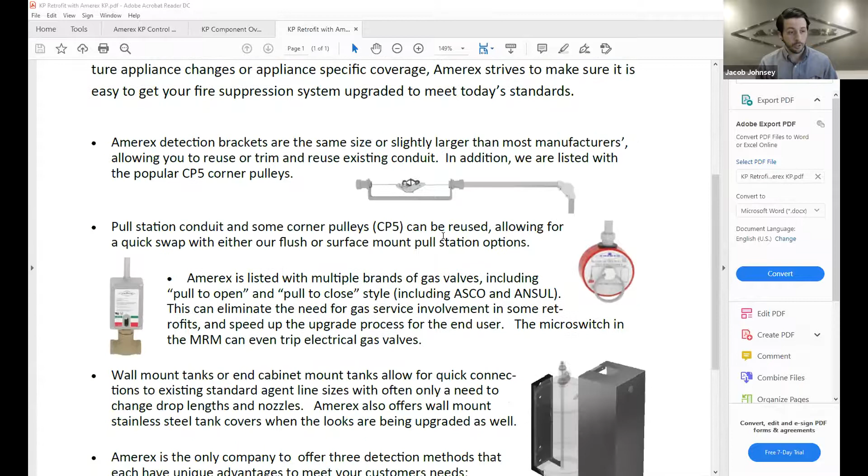The third one that I'll just kind of touch on here is the gas valve. So we're listed with multiple popular gas valves already. So there's a good chance that the gas valve that's already at that job is compatible and works with the Amerex system.

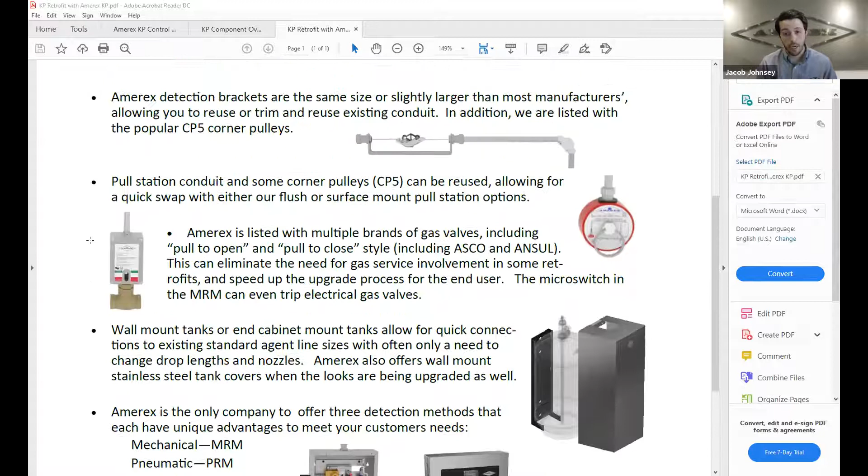The third document we'll get to, and this is a huge document, but this is a really good document. So I hope you guys have a couple hours. We're going to go just page by page. There's all 96 pages here to make sure. I'm just kidding, obviously. It's our parts book and component overview. So this does a great job of giving you just that, an overview of our entire systems, what goes into the makeup of all these.

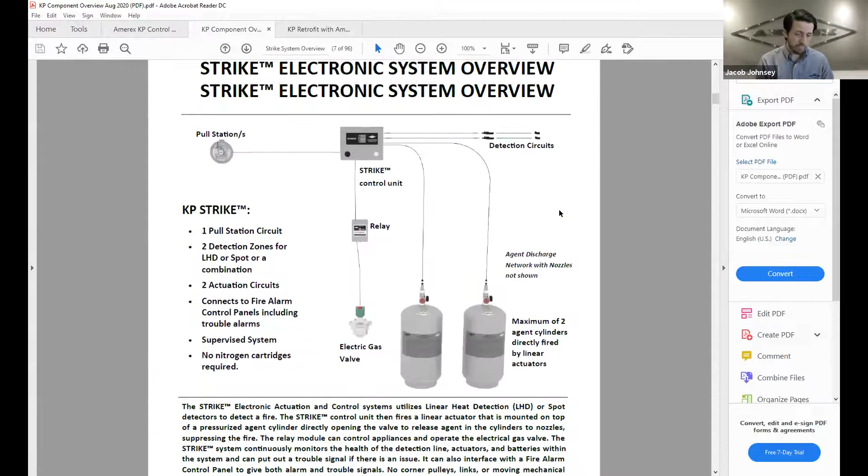And obviously, a lot of you guys already kind of know this, but it just gives you a good tool to work off, especially if you're working with anybody new within your organization, or if you're working with a customer that's not familiar with the fire suppression needs that they have.

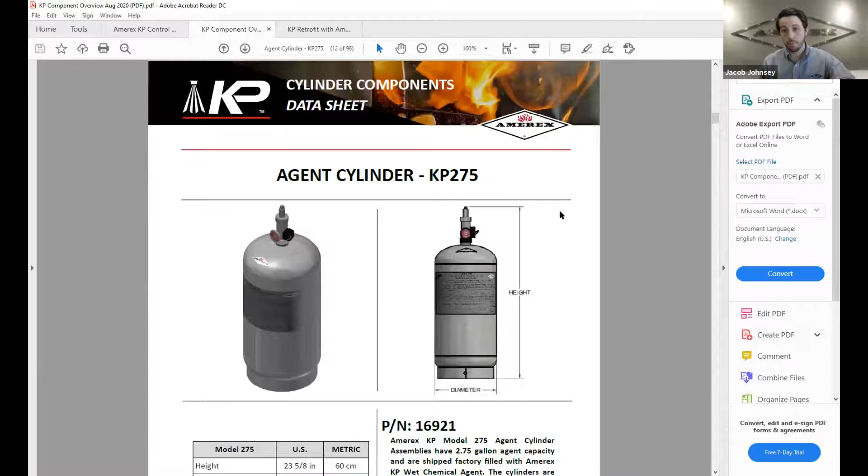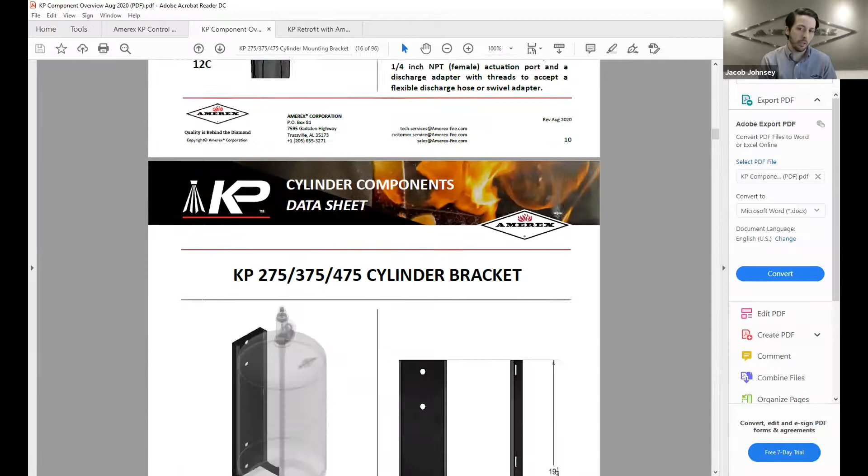A great thing that I think this adds capabilities to is just the fact that you can go to any of these components and see what that component looks like and see what the Amerex part number is. Because sometimes you kind of know what it is that you're trying to order or buy, but you need that part number to work off of, whether you're using our web store or our customer service.

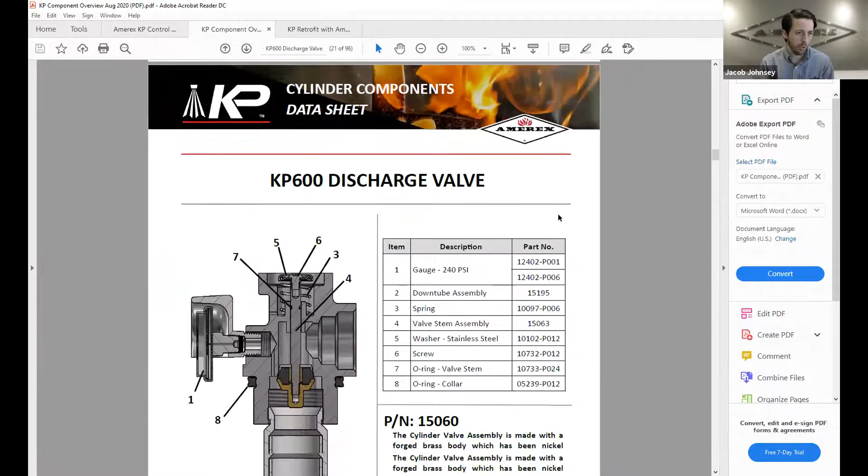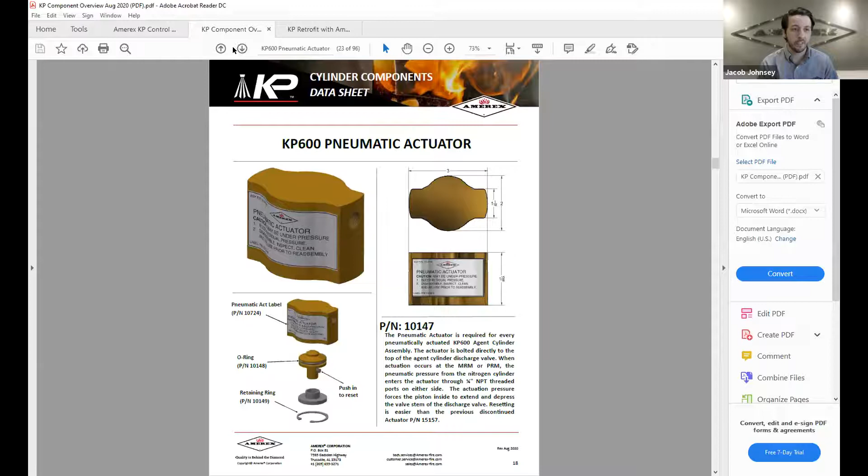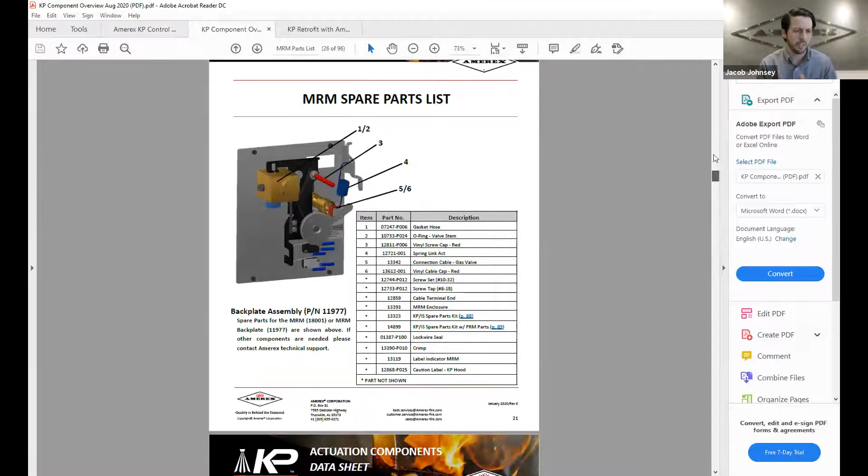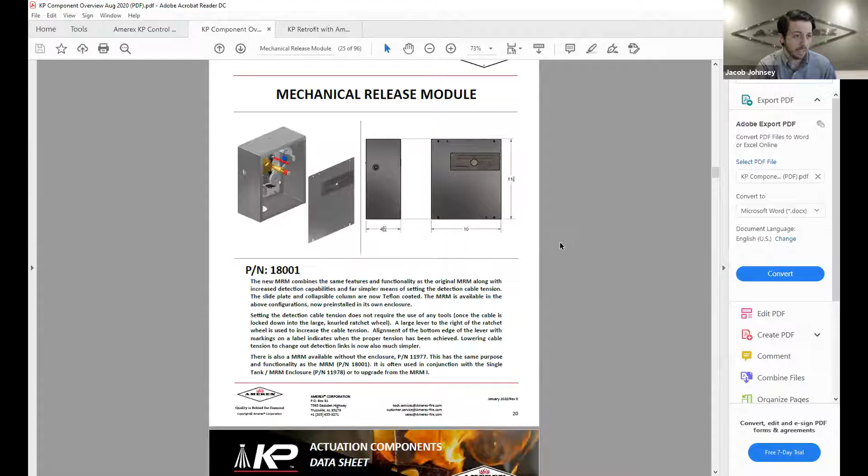Goes through all the components that are used with the KP and the ZD systems. And we really just wanted to make sure that everybody was aware that this is out there. It's just a great visual tool to help you kind of get through the ordering process or any problems that you're having out in the field trying to identify parts during an install.

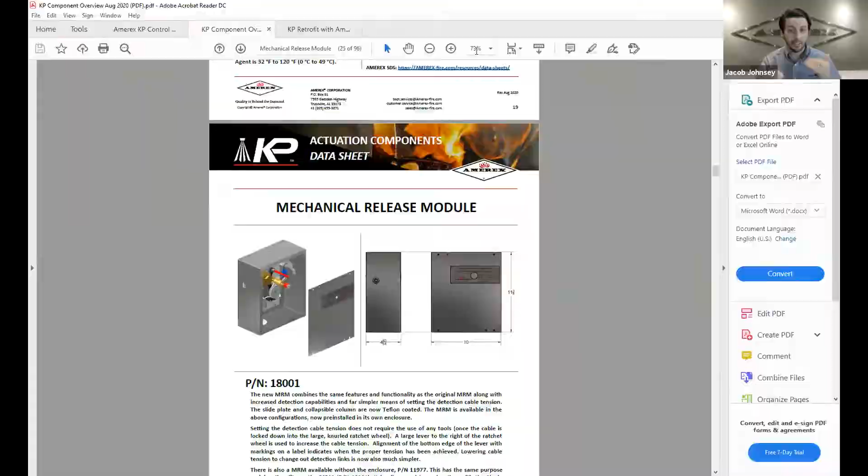Perfect. Lastly, I'd like to talk about our KP and ZD Project Estimator. So if you're like me, you probably enjoy Excel. You enjoy things that kind of automate the process to make things a little bit quicker. And that's really what we wanted to give with this document. Some of you may already be very familiar.

Go ahead. Could you share your estimator, please? They weren't seeing the document you had up before. I was sharing the component overview, and I just stopped sharing. So could you take over the screen and share your estimator? Yeah, sorry. I apologize for that. I did not realize y'all weren't able to follow along with me. Thanks for pulling the audible there, Jamie. And everybody see the estimator? Are you guys able to see that, Jamie? I can now. Yes, sir. Okay. Apologize for that. And thanks, Jamie, for helping me out.

So yeah, this is a great tool for when you're going through and actually speccing out a full job. So let's say we're going to go in here. We're going to say that, well, we know zone defense is a great option for kitchens that might be changed out. We're going to stick with our fusible links, click through and decide that, all right, maybe we've got to put on this first one of 9 feet. And then it goes ahead and starts populating our pricing depending on what we're selecting.

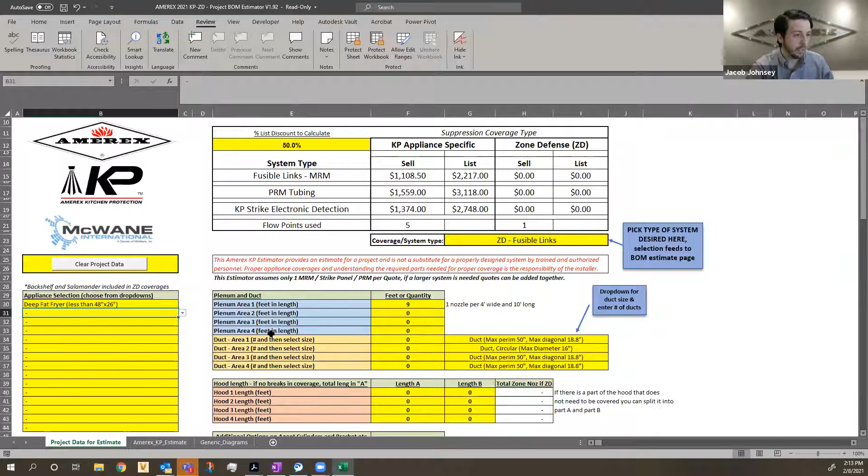Go over here and maybe I decide that I want to input the specific appliances that we're going to use. So even though we're using ZD, we could still say that, hey, we've got some specific appliances through here that we want to add to this estimator. There's a lot of options in here. You can even go through and select, hey, our manual pull station needs to be this far away, 25 feet. So it just equips you with a tool that you can really take a detailed approach to the job that you're trying to build out.

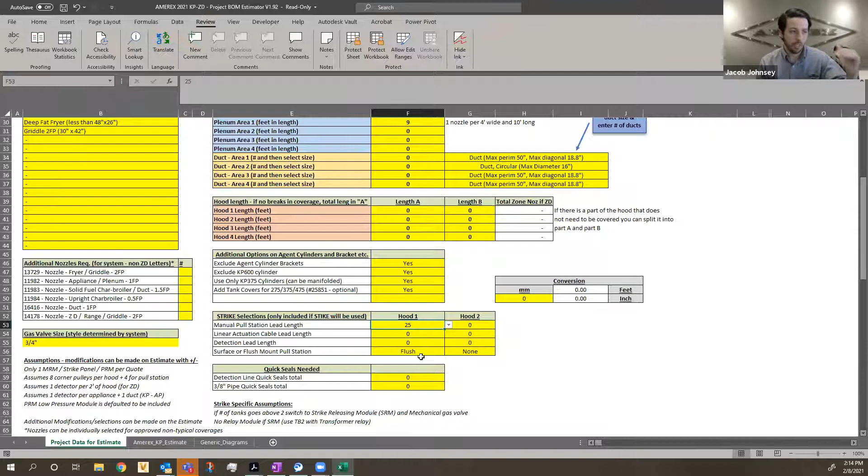Make sure that you're kind of double checking, hey, I think this is what I would probably need. This is what my order should look like. Use our estimator. It's a great tool to just kind of back up what you already believe that job to look like. Get everything put into here. And ultimately, the second page is the big part. This is what really drops in all of the needed bill of material for the job that you're speccing out.

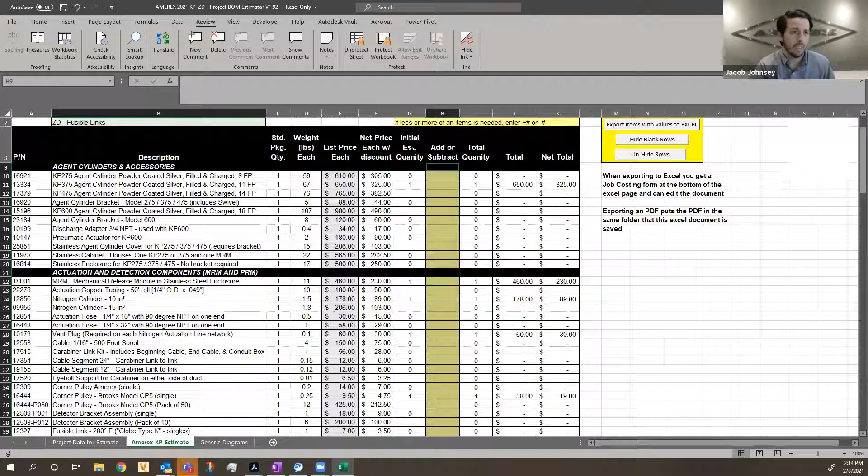So that's what I've got. Really appreciate you guys taking the time to see these resources. We hope that this is a great tool for all of you to use. And I'm going to kick this over to David Rice and let him take over.

Actually, let me step in really quick. If you would relinquish your screen, I'll pop back up the PowerPoint real quick. Sure. And let me get us back to where we belong. Jacob, let me know when you see the resources documents page.

Yep, we're there, Jamie. Outstanding.

At the beginning of the pandemic, we needed to figure out what we were going to do during the pandemic to make our business better when we were not able to go out and touch everybody as often as we normally do or talk to everybody as often as we do. And we came to the conclusion that we wanted to make our documentation better and easier for our customers to use, have it help them in the market more, and give them better places to find it.

So what you've seen with Jacob here is some inventive documents that are designed to help you with your presentation to your customers. We're happy to set up webinars with these, happy to set up lunch and learns with these, happy to help you train your sales team on how to use these documents. So having said that, I will go to the next screen, and Mr. David Rice will be coming in to tell us where you can find all of these documents.

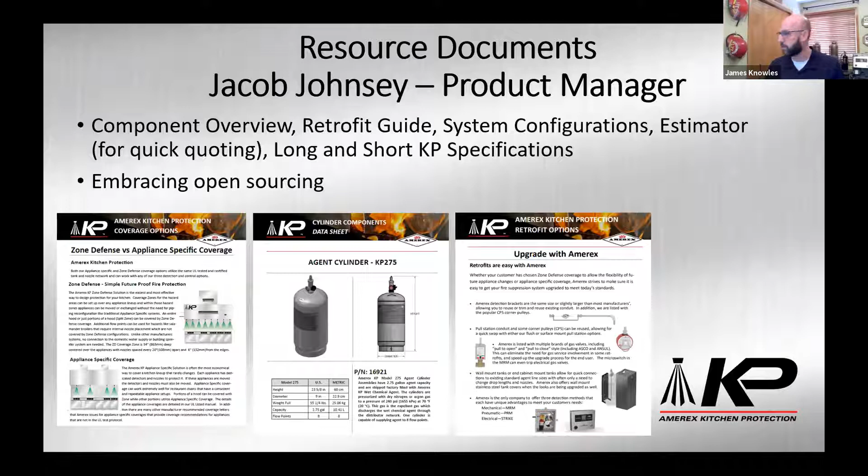Okay. And thanks a lot, Jamie. I appreciate that. Do you have your screen up, David? I'm sorry, go ahead. Is your screen up, sir? It is. That's perfect. Thank you.

All right. My name is David Rice. I'm the Director of Training for Amerex. A lot of the people on the list, I'm looking at our attendees list, and I know a lot of you guys already. I know many of you have sat through my classes. I'll go ahead and issue an apology for that now, but nonetheless, they get progressively better.

Now, as Jamie had mentioned just a couple of seconds ago, we did have to shift gears pretty rapidly at the beginning of 2020 when the whole COVID thing started closing everything down. And one of the things that followed suit with that was also a shift to online training. We took all of our standard certificate classes that we normally would do in person at various different times throughout the year and shifted those to a 100% online format. And that has been met with rousing success.

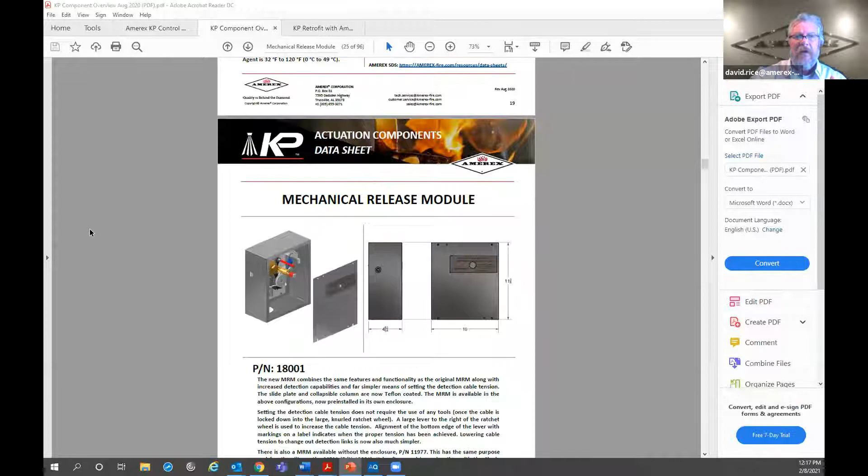In support of that, we've got a couple of different areas online that you can also access to get various different resource documents. So we're just going to start with a couple of these, in no particular order. I'm going to just show you a couple of them live real quick. So I'm going to jump over and share my screen with you real quickly. Okay, there we go. I'm going to put my headphones on so I can hear myself talk. You should be now seeing the amerex-fire.com site.

Another couple of pieces I want to show you are restricted, but you certainly can have access to them, and one of which is the distributor login. Okay, the distributor login is what was formerly called the .biz. For those of you that have been around for a while, you probably would know this as the .biz site, and there's tons of information posted here, namely software downloads.

Okay, just a few minutes ago, Jacob made a mention of our strike unit, our electronic detection, which does offer you also some programming options. And in order to effect those programming options, you'll need to have the interface. Well, the interface is provided to you free of charge through the .biz site. You simply click the software downloads, and the very first option is going to be the strike unit.

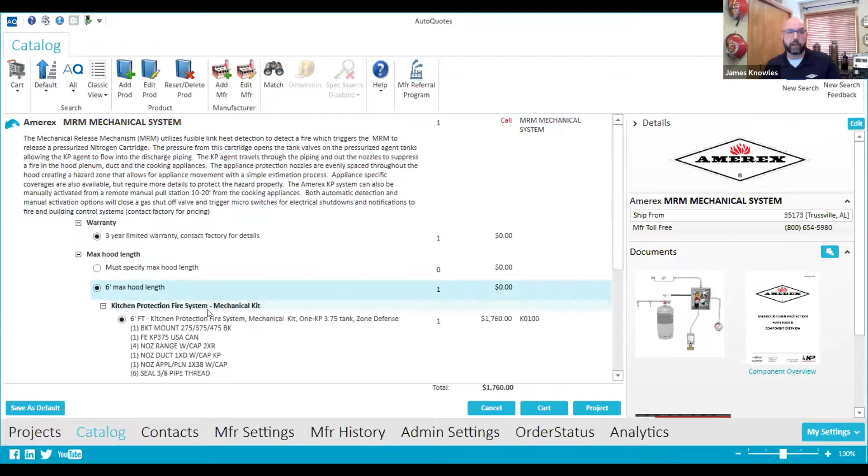We have two different configurations in AutoQuotes and in Specify. One is the mechanical MRM system with zone defense coverages that you can see here. It's got a basic description of what zone defense is and how it works. It then asks the designer to specify the hood length, and they have to pick maximum 6 feet, and when they do that, it'll show them a bill of materials for a 6-foot kit to cover a 6-foot hood.

If you click on a different one, it will show you the 9.25, the 12.5 foot. But in all cases, it's showing the kitchen designer a kit that makes up a system that will cover 12.5 feet of hood in this particular case. And then it gives them the list price for that equipment.

At that point, they will be connected with a find a distributor that can come over here on the right. Click find a distributor here. It will take them to the Amerex website where they can then select the distributor in that location to talk to about getting an RFQ out to them to bid the system.

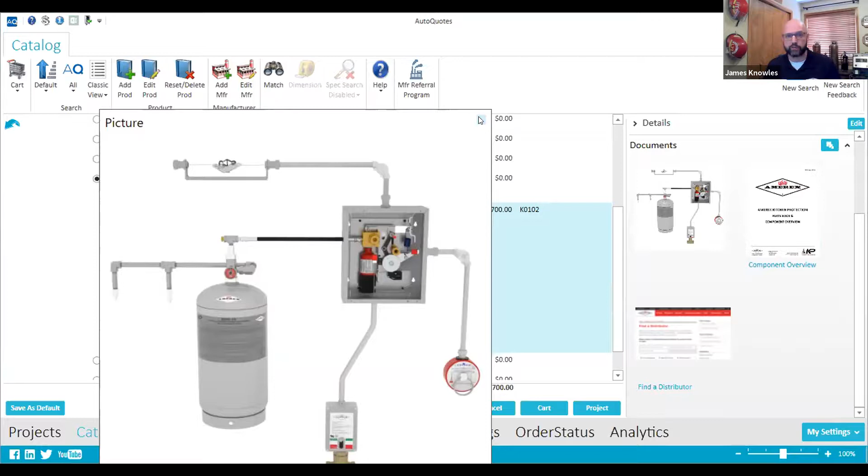Also, the component overview is right here in an easy click for them to look at and see all the different configurations, see all the different parts, and then simply a picture of an MRM and how a system goes together. Remember, we're dealing with people who aren't fire technicians. They're food service consultants, so they don't always know our product. We wanted to show them some good basic pictures of what that is. So that is the mechanical system.

We also have our Strike electronic control system with zone defense coverage set up on Auto Quotes as well. You hit the configure tab. It's going to show you the same kits and the same configuration we just saw above, but these kits are all populated with Strike electronic detection and control versus an MRM or a mechanical release.

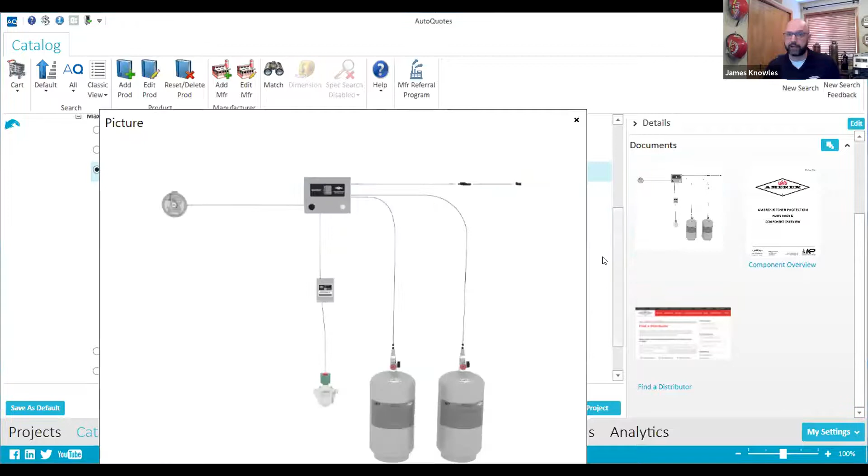But you do the same exercise, click on 9.25, it'll give you the bill of materials, the list price for the parts. You can still show a configuration, so it shows the system. The component overview is there, and also find a distributor. So both of these platforms work similarly. I'm not going to show you Specify today, but they definitely work similarly. And between the two of them,

Oh, let me do this real quick. Sorry about that. As soon as I get my screen shared back to where I belong, we'll be in good shape.

Okay, so Specify and Auto Quotes are two platforms that we're now on to get our data out to people that are designing and building kitchens. The third line item on our slide here are the kitchen designers and regional groups for FCSI. FCSI is the Foodservice Consultants Society International. They're a global organization of food service consultants. We have a membership list for them, and we interact with them as we can.

If you're serious about driving specifications in your region, reach out, if you're an international customer, to your McWane International salesperson, or if you're domestic, to your Amerex salesperson, and we can get you the kitchen designers that are in your area to work and to talk to.